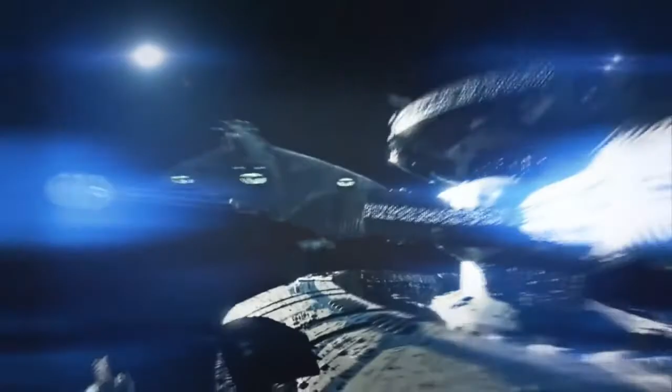Would you like to be able to see into the future? That is an intriguing question that has been contemplated time and time again throughout human history. Famous stories from the Oracle of Delphi all the way to the hysteria around the Mayan calendar in modern times have in some way dealt with the idea of humans seeing into the future. This idea has shaped popular culture and our science fiction with that one tantalizing idea of what if.

In the real world, the answer to the question of can we see into the future has been answered with a resounding no. In our ever-evolving society, the trend today is to look toward the future by relying on predictive modeling to best predict the probability of an outcome. But we all know that even these well-thought-out predictions based on data often turn out to be not so predictable.

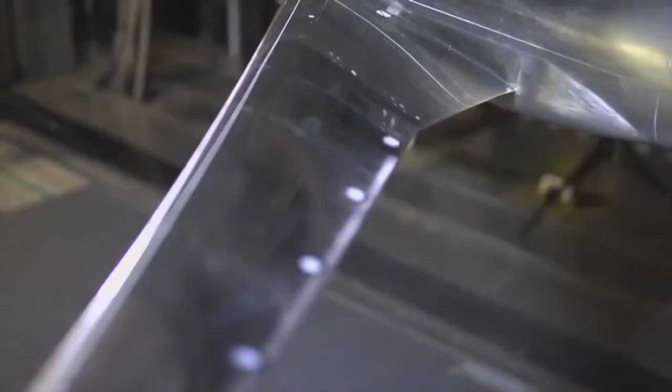Although it's clear that future events remain virtually unknowable, there is one group within NASA that comes as close as you can to seeing into the future. Throughout NASA's field centers, members of the Fixed Wing Project team are peering into the future every day and coming up with concepts that they believe will be on the next generation of aircraft. Because it takes years to plan and develop these concepts, the hardware and theories that are being tested today will be key components that enable the next generation of aircraft to take flight.

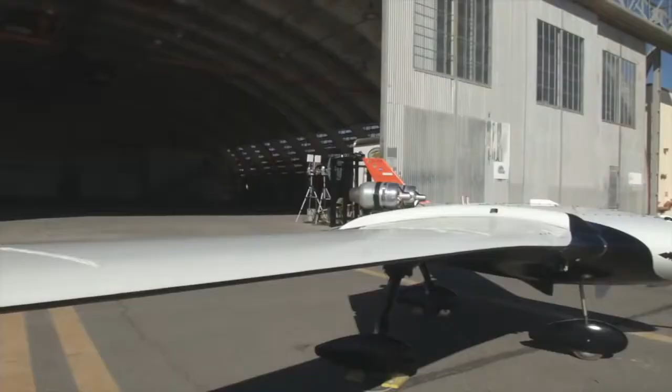On this episode of NASA X, follow us around the country as we visit members of the Fundamental Aeronautics Program's Fixed Wing Project, who are developing the framework that will shape how aircraft of the future will fly. Take a look behind the gates of NASA to see what some of these new ideas look like and how the engineers of NASA are paving the way for the ideas that will change the future of flight.

To the untrained eye, most of the aircraft of today look very similar. This is because over the past century of flight, aeronautical engineers have worked hard to optimize passenger aircraft to the point where they are as efficient and safe as possible. As a result, the basic tube and wing shape has been configured and examined from every possible angle, making it the most efficient design possible today.

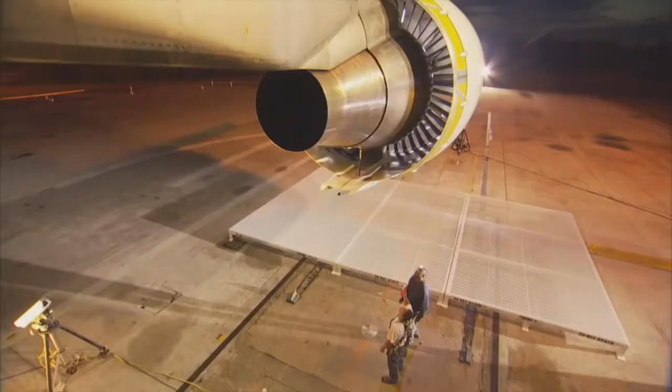Although aircraft have looked basically the same over the past few decades, if you look closely, you can see some of the major design changes. Wings that were once swept back more dramatically now are less so because of advances in aerodynamic shaping. Engines that spewed emissions by the ton are now much more efficient. Materials that were once so heavy that they significantly weighed down a craft are now much lighter and stronger.

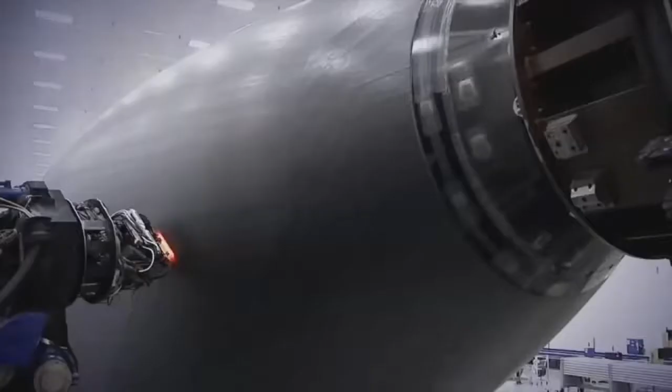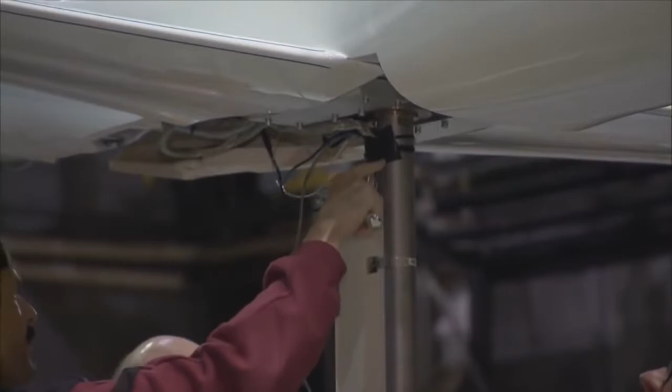With all this improvement and efficiency, it is fair to ask if there is anything else that can be done to make flight even better. The answer is of course yes. Behind the gates of NASA, there are scores of researchers who know that we can still make aircraft better because they are working toward these long-term goals every day. Some of these researchers from the Fixed Wing Project are working on so-called N+3 configurations and goals.

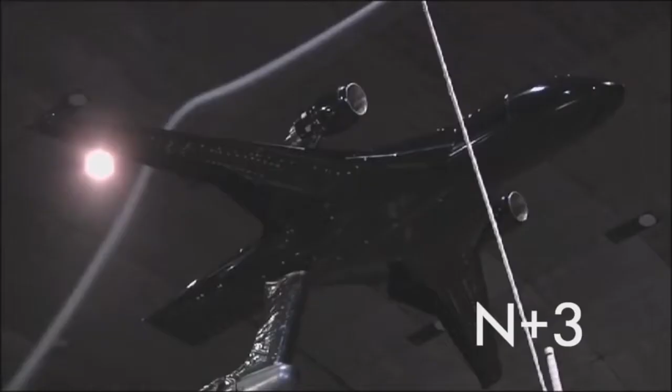In mathematical terms, the letter N is where you start now. N+1 is the next step. N+2 is just beyond that, and so on. Here in the Fixed Wing Project, N+3 equates to aircraft that will be flying in around the 2030-2035 timeframe. For this team, everything is on the table, including engines, fuels, wings, and fuselage shapes.

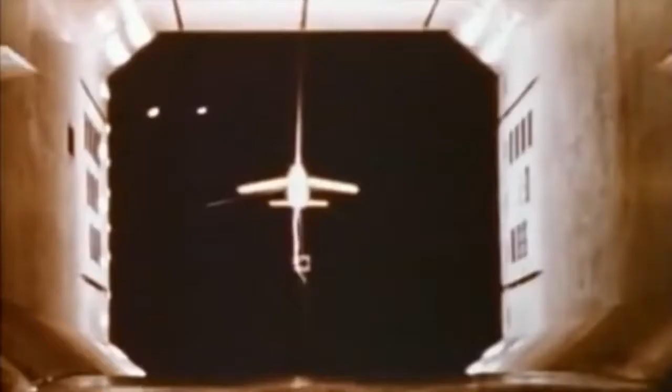Well, we need to remember the first A in NASA is aeronautics. So it's a National Aeronautics and Space Administration. Aeronautics is the field of research for airplanes. The airplanes that we fly today were researched and experimented within NASA many years ago. So we're trying to continue that tradition, that important work that we have done for the nation and the world for 20, 30 years from now.

Fixed Wing is a NASA research program where we are doing activities to try to improve the airplanes that we're going to be flying in the future. We're trying to make them less noisy. We're trying to make them better for the environment. We're trying to make them in a fashion that they will use less fuel.

The research we're doing is important because air travel is such an important part of your life. People travel, even if you don't travel, cargo gets carried every single day. You use something every single day that gets carried by an aircraft. It's part of our way of life these days, and it often gets taken for granted.

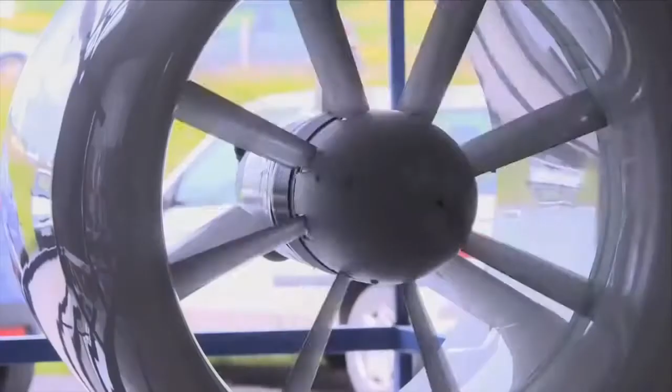There are challenges though, so we are focused on exploring and developing technologies and concepts to improve the energy efficiency and environmental compatibility of transport aircraft. With this mandate to significantly lower noise and emissions and increase performance for subsonic aircraft, there will be a need to address virtually every aspect of the current aircraft configuration, including developing new materials and engines, testing alternative fuels, and even changing the fundamental shape of the aircraft.

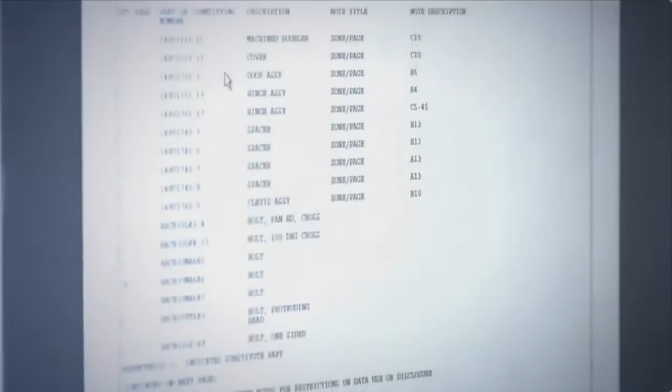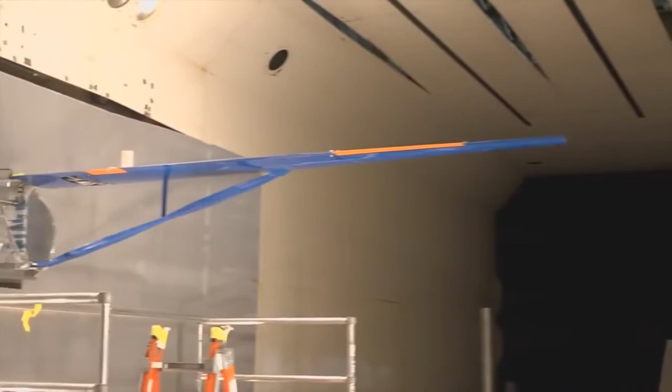All across the country, fixed-wing researchers are doing just that. Major advancements are being made into the understanding of how future aircraft will fly. Because there are so many areas of study, let's first look at something that has the potential to be used today as well as in the 2030 timeframe: alternative fuels.

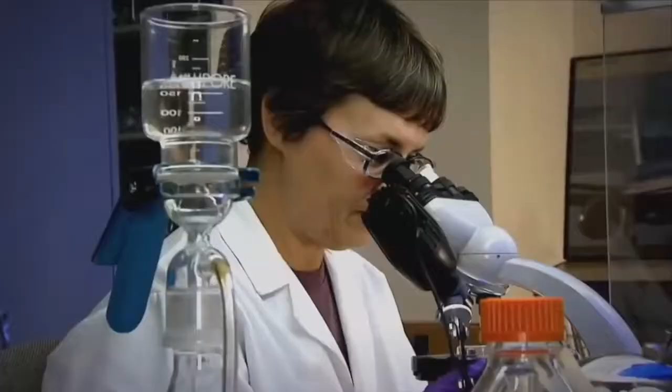On this beautiful morning at NASA Dryden in California's high desert, a test called ACCESS, or the Alternative Fuel Effects on Contrails and Cruise Emissions test, was performed to study the effects of alternate biofuel on engine performance, emissions, and aircraft-generated contrails at altitude.

For this test, two aircraft were flown in tandem. The first is NASA's DC-8, which will be burning an alternative fuel. The second aircraft is NASA's Falcon, which will fly directly behind the DC-8 to measure and characterize the emissions coming out of the engines from the alternative fuel. Here is NASA's Bruce Anderson to explain.

NASA's role is in assessing the combustion characteristics of alternative fuels, as well as determining how these fuels will affect the performance and emissions from aircraft. To understand how aircraft affect the climate, we need to make measurements at cruise altitudes.

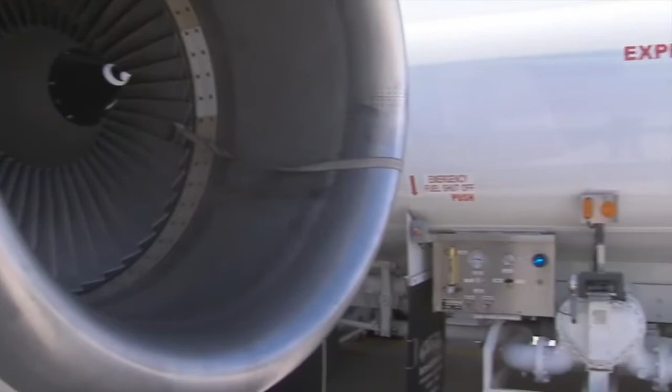So the focus of ACCESS, the alternative fuel effects on contrails and cruise emissions, was to fly behind the DC-8 in flight and look at its emission and contrail characteristics as we changed from standard jet fuel to a fuel that was a blend made from camelina plant oil, with 50% Jet A added. There are some other groups out there.

Tyson Foods is making a biodiesel and biojet fuel from chicken fat that they sweep up on their processing plant floors. So there's a number of different ways of making these alternative fuels. All of them result in a fairly clean kerosene that doesn't have nearly the contaminants in it that fuels from refineries do.

The fundamental thing is the aircraft has to retain its performance characteristics when you burn a fuel. You can't have any drop in power. The fuel also has to have similar characteristics in terms of density and volume to kerosene. So what we're looking at is drop-in fuels.

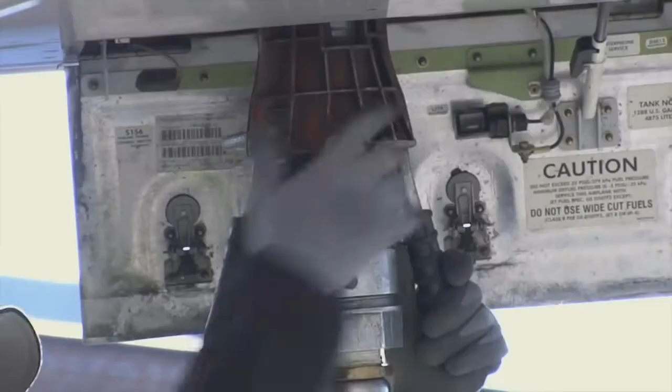A lot of the fuel systems on the aircraft are designed to rely on the aromatics in fossil fuels to swell the seals and make them leak-tight. So when we fly an alternative fuel, we have to mix it with standard fuel to retain those properties. Otherwise, the fuel would just leak out of the aircraft.

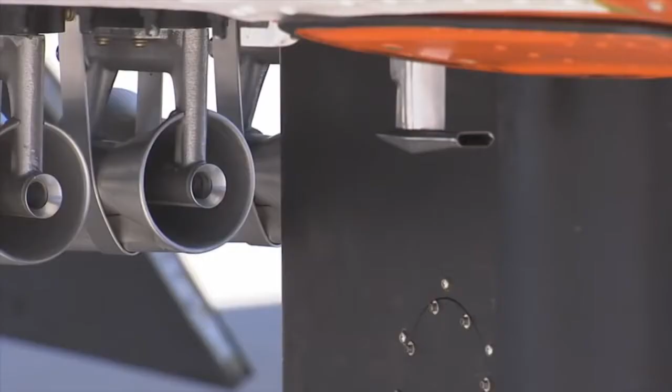And then the second thing we're looking at is just the emission characteristics — by that I mean the amount of pollutant generated per kilogram of fuel burned. After the first few flights, it was shown that using these types of alternative fuels could significantly reduce emissions at cruise altitudes, particularly soot emissions.

Work continues to better understand how to use these fuels and how to make them even more efficient for future aircraft.

Other than alternative fuels, there are some other ideas out there for finding more efficient ways to power aircraft. If we look on our roads today, many of the cars now being driven run on a combination of fuel and electricity. The idea that aircraft could do this seemed far-fetched only a few short years ago, but today this idea is gaining traction. There are several ideas on how to do this, so let's take a look at a few.

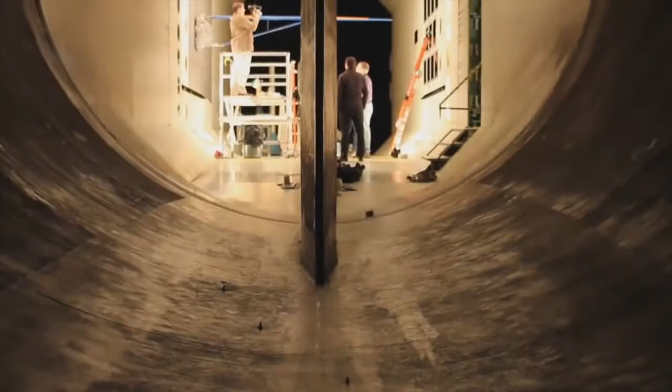Here, a team is looking over a new Boeing aircraft design called Sugar Volt. This unique design has several interesting changes, like the truss-braced wings that have the potential to reduce the drag of the wings by making them longer and thinner. Because thin, long wings have the tendency to flex more, designers have included a clever, efficient truss structure to support them. This design has the potential to reduce drag and weight, making the craft more efficient to operate.

At first glance, those unique structural changes may look like the biggest game changer for this type of aircraft, but the Sugar concept holds another surprise as well. What's less obvious to the eye is that it has an unconventional propulsion system.

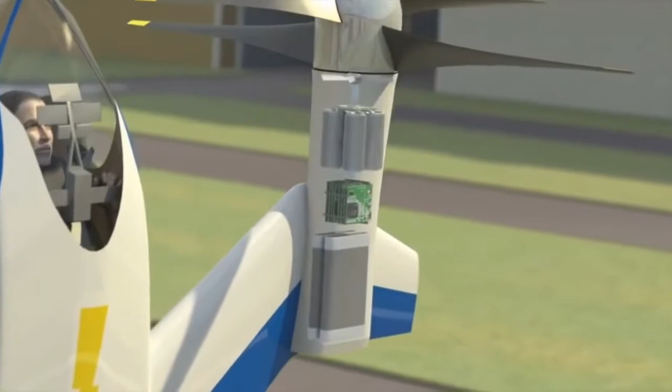It's a hybrid gas-electric concept that's closer to what you see in a Prius. It has batteries and gas turbine engine technology. It requires advances to battery technology, but those are happening throughout the world independent of the aerospace industry, and we're trying to leverage that. We do it on cars, we should be able to do it on airplanes eventually.

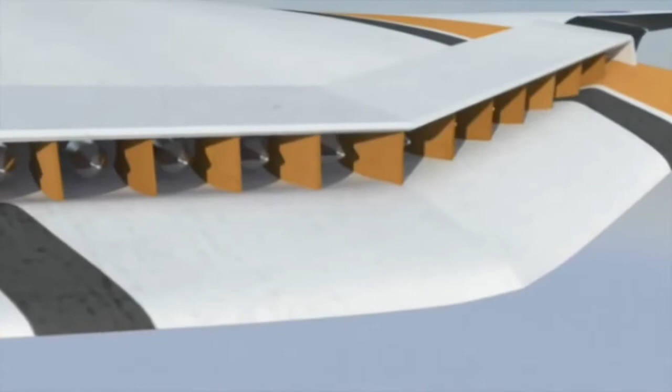The challenge is to take those batteries and have enough energy or power content while keeping them lightweight. Where we are today, I think, is at the dawn of the age where we can start to see electric propulsion or hybrid electric propulsion. You'll see it on smaller aircraft first before you see it on the large commercial transports. But that's what we're working towards.

That's good for cleanliness, it's good for noise, it's good for energy efficiency. It has its challenges — that's why we're working on it, and that's why it's not being done today.

The idea behind this vehicle is to have its twin engines burn fuel when great power is needed, like at takeoff. But when the craft is in a cruise configuration, a switch can be made over to a battery electric mode to supplement or even replace power to the engines. If successful, this could reduce fuel burn by up to 70%.

Another concept called turbo-electric propulsion is being studied here at the NASA Glenn Research Center. Here is NASA's Jerry Brown to explain.

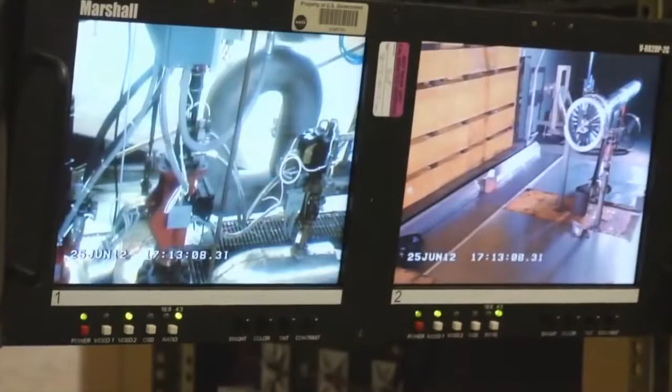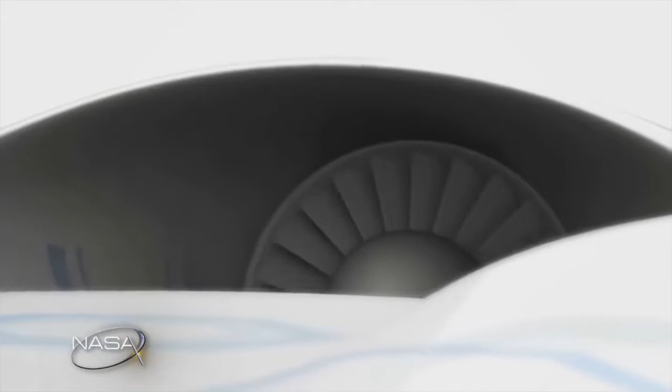There's not been electric airplanes except in very small sizes, and the reason is that electric motors and generators tend to be too heavy for flight. We're hoping to change that, and to get a benefit from saving a whole lot of fuel in the process. The type of electric propulsion we're talking about today is turbo-electric propulsion. We're going to keep the turbine engine because it's really good for a lot of power in a small power plant, and then use its power to drive a generator, send electricity to motors that drive fans that do the propulsion.

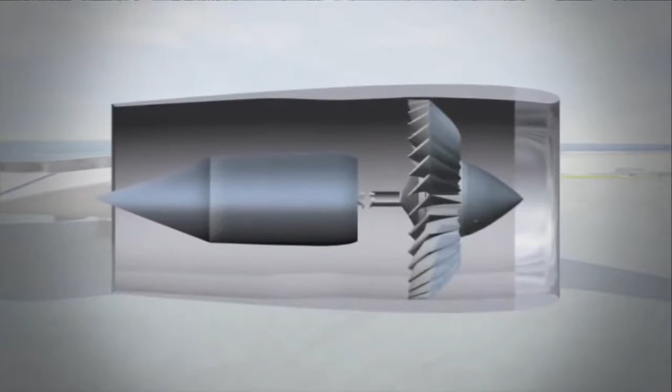This concept will look very different from vehicles of today as well. Potential designs include 2 large turbine engines on the wingtips that drive 2 large generators inside the body. The generators in turn power a number of fans, providing the propulsion the aircraft needs to fly.

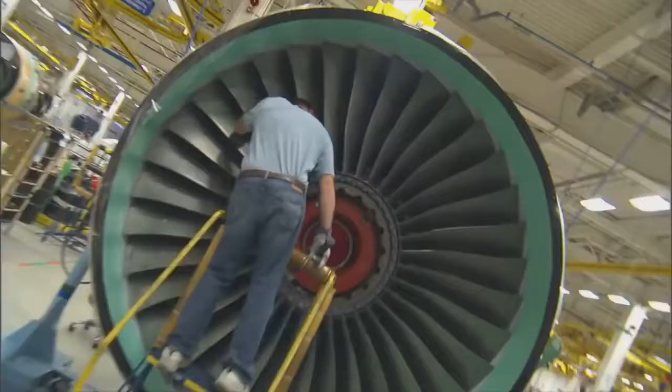What we want to do here is break the turbine engine from the fan, and that gives the aircraft designer a lot of freedom. If he can move the turbine engine somewhere else in the airplane, that may itself have advantages. The engine and the fans don't have to turn at the same speed, and you don't even have to have the same number of fans.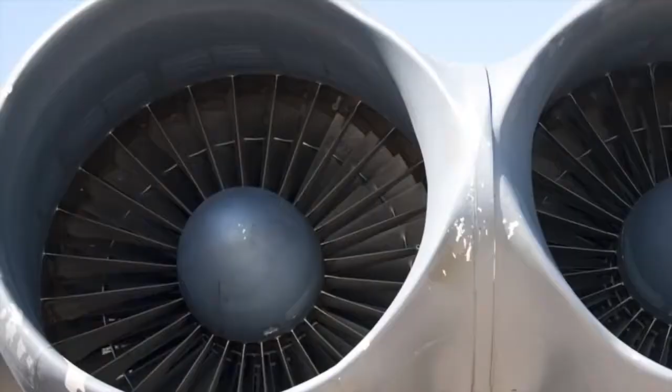That's what we're really looking for: we want to have an array of a whole bunch of fans, maybe 15 of them, say, and just 2 engines. You like to keep just 2 big engines because the big engine is much more efficient.

This idea is intriguing, but big changes need to be made to make it viable. One major challenge is the need to reduce the size of the generators, because the generators of today are way too big to fit on an aircraft.

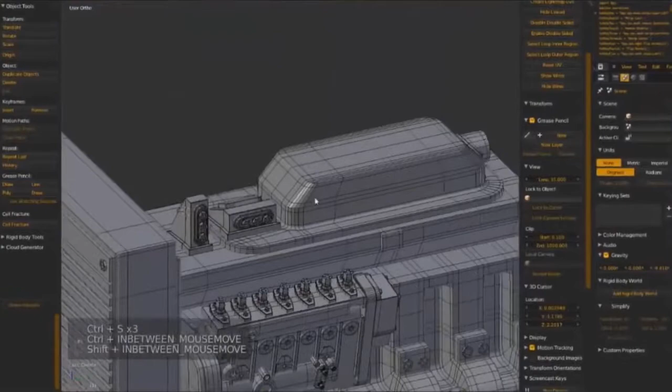One idea the NASA team is looking at is a way to remove the current type of copper windings in the generator and replace it with superconducting material. This change would allow the generators to shrink, making them viable to fit on future aircraft.

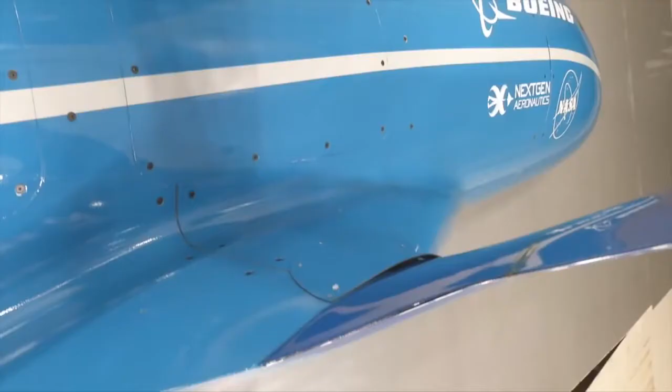As we've seen so far, new aircraft designs are coming online that have the potential to greatly improve aircraft efficiency. Another of these revolutionary designs has come out of a joint MIT and NASA study. This unique design is called the double bubble and has the potential to reduce fuel burn by up to 70% as well.

The MIT D8 double bubble design is something we've been working with MIT on for a number of years. The idea is to take some of the lift that you would normally get from the wings and try to move that to the fuselage.

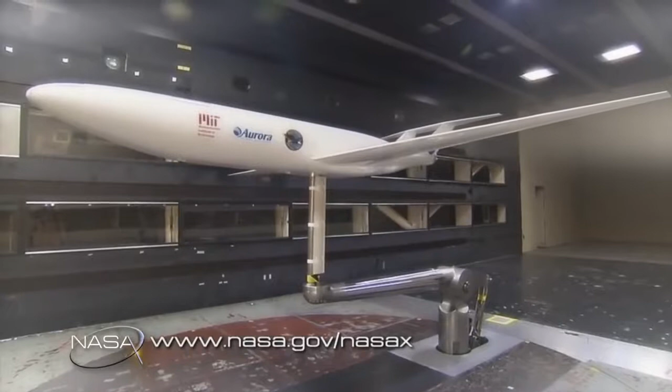Another thing done to enable laminar flow on this vehicle is to reduce the sweep of the wings. It's easier to maintain laminar flow if the wings, instead of being swept back like a lot of modern commercial transports, are more perpendicular to the side of the body of the plane.

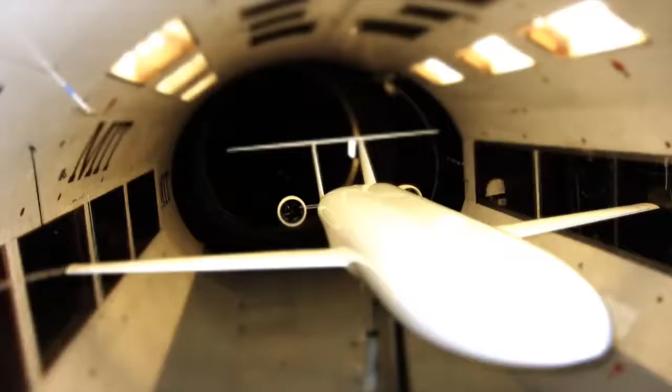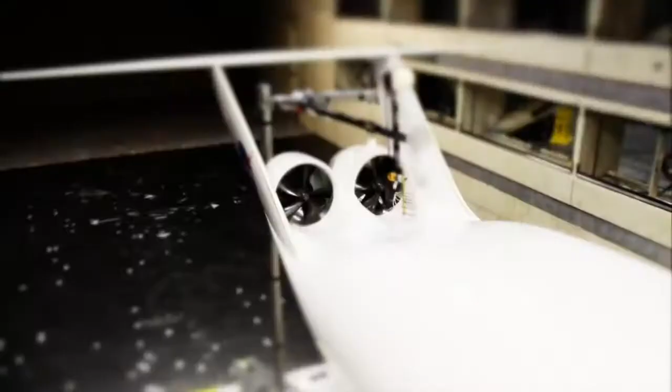We're trying to push the envelope, to see what is the maximum benefit that could be obtained by this kind of configuration, to understand what's really possible in terms of fuel savings. Aiding much of the work is improved computational fluid dynamics and wind tunnel testing. Right here in this building, we have the Pleiades supercomputer, which is one of the largest supercomputers in the US and in the world.

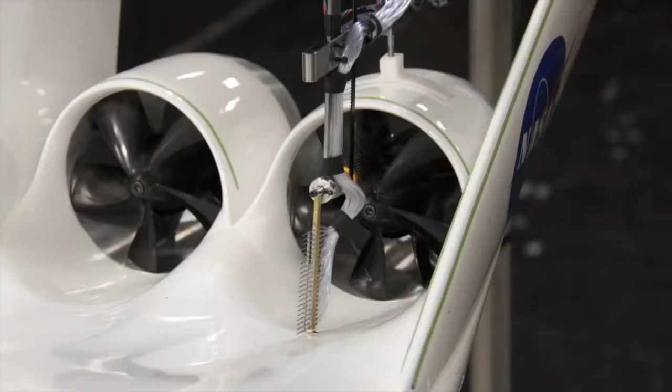It has 200,000 processors working on the problem if you use the whole machine on one problem. So it's a very large machine, and we need that because we need to do very big problems here at NASA. The aeronautics research directorate is using it to try to simulate the flow over these N+3 configurations.

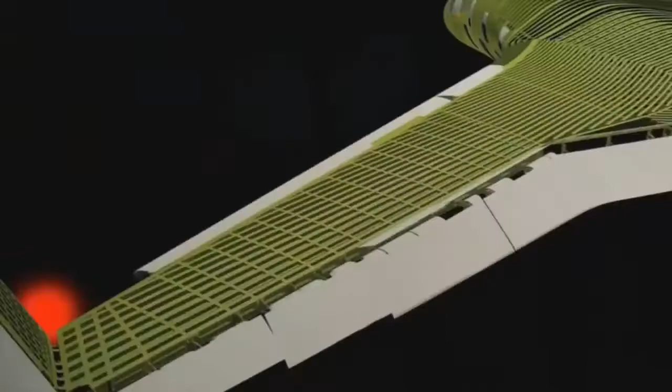To capture all the detail you'd see on a vehicle like this, including what's going on inside the combustors of the engines, you need a lot of grid points to resolve all the fluid motion over the airplane. Resolving all that physics in 3 dimensions creates very large computational grids that require very big machines to advance the equations that govern the fluid motion and get the CFD, computational fluid dynamics solutions we use to make our assessments.

Aerodynamicists today are able to model ideas on computers, allowing them to test many different configurations before a wind tunnel model is ever built. Once a design is agreed upon, a wind tunnel model can then be fabricated and tested. This process was used for the double bubble as well, but the wind tunnel test showed surprising results.

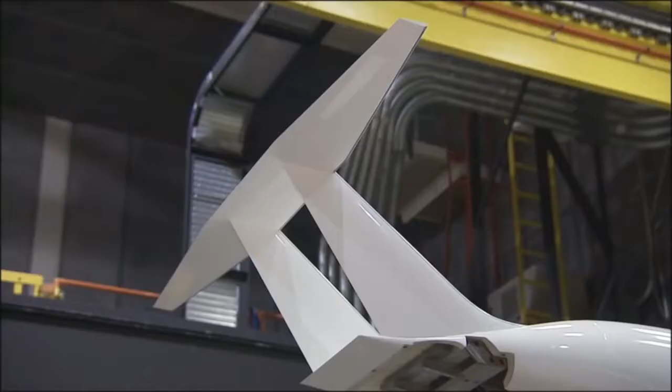The good news is we've just completed the first test of this configuration in the Langley 14x22 wind tunnel at NASA Langley, and it showed an even greater reduction, a more fuel efficient benefit to this technology than we had predicted on paper with our low-order models. So we're trying to digest the experimental data that shows this nice benefit in fuel efficiency from this configuration.

At the same time, we're also using the supercomputer here at NASA Ames, the Pleiades supercomputer, to do computational fluid dynamics CFD runs of these same configurations and see if we can confirm that benefit on the computational side as well. Testing will continue on the double bubble, and if the results hold, you may see this type of aircraft at an airport near you in the future.

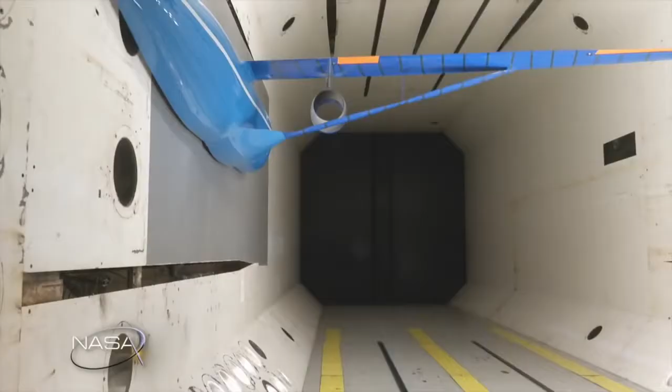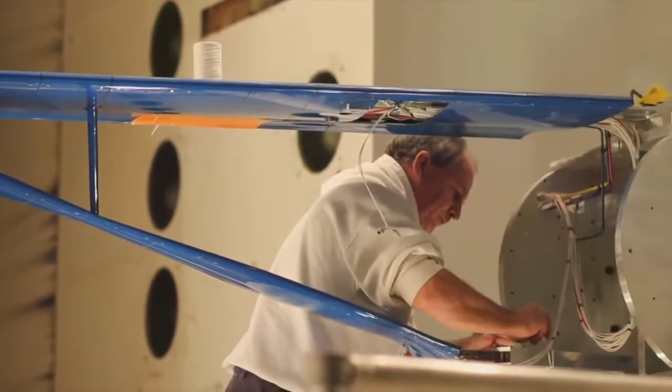When testing aircraft, many different stages occur. We have already mentioned CFD and wind tunnel testing, but another tool for testing future designs is to build a flying scale model. Although CFD and wind tunnel modeling is the mainstay, test flights of these small, scaled-down versions of an aircraft often offer some of the most dramatic results for researchers.

That is the case with this aircraft, called the X-56. This aircraft is being used as a test bed to understand how different wing configurations work and how a unique idea called active control may be used in the future.

The whole concept behind the X-56 is that they've long known a very long wingspan vehicle is more efficient than short wingspan vehicles. The problem, though, is when you get a very long wingspan, you start to get into issues with flutter modes that creep into the vehicle, so the wing will go unstable and in extreme cases will rip off the vehicle. To get around that, you can use active flight controls to suppress those flutter modes.

Active control means you put things like accelerometers within the wing, and as soon as you sense the wing is starting to get into these flutter modes, you use the control surfaces behind the wing to damp that out. So the airplane, as it's flying, is continually fighting these modes and keeping the wing straight and stiff. Then you can build a lighter, longer wingspan vehicle that is more efficient.

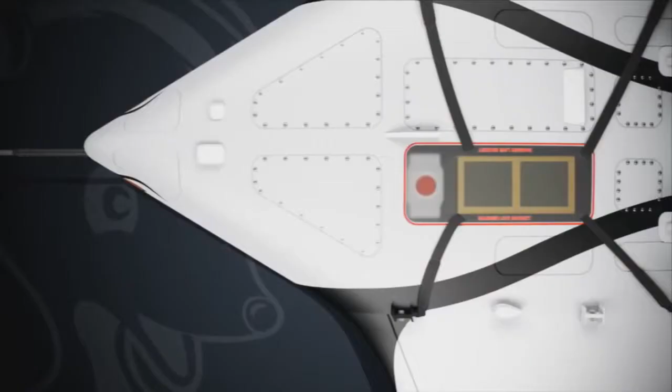This vehicle, funded by the Air Force, was built as a multi-utility technology test bed. They call it the MUTT for short, and it's built to do a lot of different kinds of testing in aeronautics. The wings are removable—you can put on a stiff wing, a flex wing, or do a joined wing configuration. We can learn quite a bit from testing this kind of vehicle.

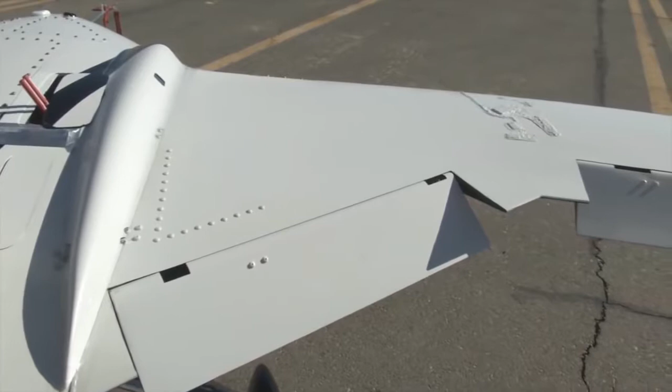Right now the focus is on flexible wings and active control of flexible wings, but in the future there are many experiments that can be done with this vehicle. The research on control of lightweight, flexible wings being performed today on the X-56 is key to enabling the long, thin, low-drag, low-weight wings of tomorrow's N+3 configurations.

Much is going into understanding what it will take to improve the already incredibly efficient aircraft of today into ultra-efficient vehicles of the future. Although we don't have all the answers yet, it's clear that NASA and its brilliant engineers and researchers are helping to lead the way to a safer and more efficient way to travel.

We are nowhere near the maximum that we can get out of this industry. And there is a lot of work to do, and that's what my team is doing. That's what we're doing within NASA, and I cannot wait for the future.